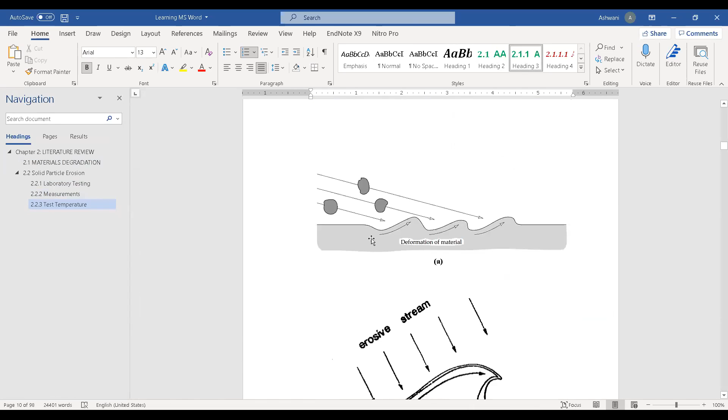Sorry, measurements is heading 3. Then the next heading is test temperature, heading 3. It is creating automatic numbers as well. Now this is another heading, heading 4 - test temperature, or we can say heading 3, depending upon the document's requirement.

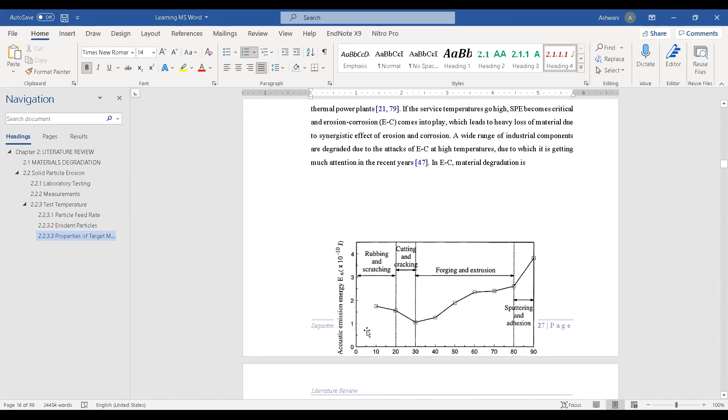So I am clicking heading 4. It is also heading 4, and heading 4 again. I have created many of the headings now. You are able to see all these headings over here in the navigation pane.

So there are a number of advantages of creating this kind of document in MS Word. If I want to navigate between different sections of the document, I simply have to click over here, similar to how we create bookmarks in a PDF document. These similar kinds of bookmarks are available.

Wherever I am clicking, I am easily navigating in the total space in the document. I can switch over to the different parts of the document.

Now coming to the next benefit, suppose you want to make a change, say this green color is not suiting you, so I am changing it to red. Suppose it suits you, then you have to go to another heading, click here, then click on whatsoever uniform formatting you want to make. So it need not be done like this.

I have undone the previous section, so it is back to the same kind of content and font. Now I will click on red color font, then go to heading 2 and right click over there. There is an option: update heading 2 to match selection. Once I click here, all the heading 2's will be changed according to the same formatting.

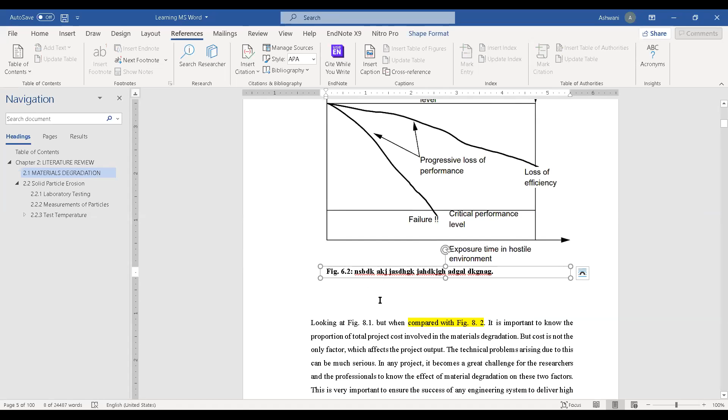Apart from again and again using the insert caption option, you can do one thing instead. I will be copying the first figure caption which was created, pressing Control C after selecting the text box for the figure caption. Now coming to the next part where your figure 2 is available, I will simply press Control V, and the same text box would be appearing over here.

Now press Shift and click on the figure. Group these two. Right now here the figure number is 1. Please don't make any manual changes over here, because you can see it is highlighted with gray color, meaning it is a field. It will be updated automatically.

Now this content is not highlighted. You can see I am moving my cursor on this text. Now this text you can change. So this is the figure 2 caption. These changes you can make over here.

Now how will this be helping me? Looking at figure 8.1, or I will write here as 8.1. I will choose the last one, figure caption 6.1. Now this is figure caption 2. Actually, I am using some shortcut keys in order to save time. So this is 6.1, you can see this is caption 6. This should be caption 6.2, and this is for the previous figure.

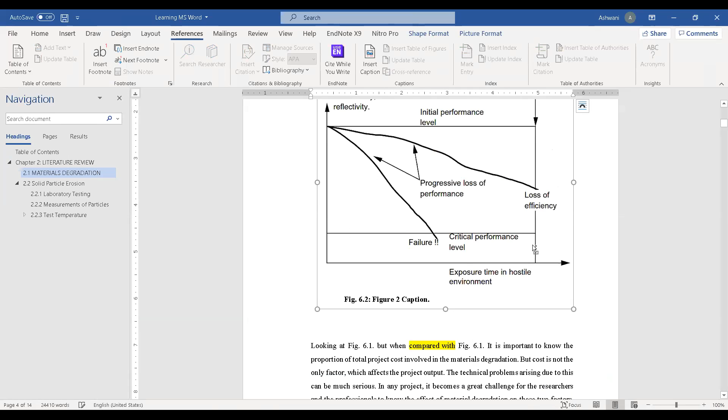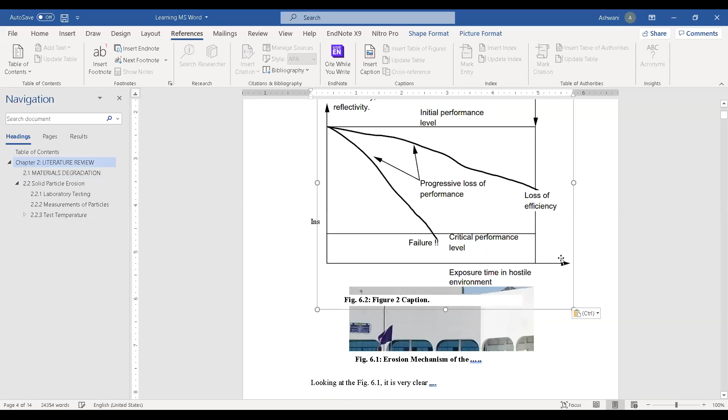Suppose you are taking this figure. I have deleted this figure, and I am taking this figure before figure 1. Okay, I have taken figure 2 before figure 1.

Now what would we normally do? We'd change this 2 to 1 and this 1 to 2, but here you don't have to make any manual changes. What you have to do is simply press Control P and come back. You will see that all the figure captions have been numbered according to the requirement. So even if you intentionally try to make the mistake, it will not allow you to. Such a wonderful system is available in all versions of MS Word, MS Office. This is a wonderful feature.

Now coming to that, this was figure 6.2. I have already mentioned figure 2. Now we had referred to it somewhere in the text.

This was figure 6.2, now it is again showing 6.2, but now we know we were referring to figure 6.1, which was earlier 6.2. How to change it? I will simply press Control A. Control A will select all the text in the document. Now you have to press the function key F9. Once you press F9, it will update all the fields within the document, whether it is table of contents, cross-referred figures, or anything else. These will be updated according to the current situation.

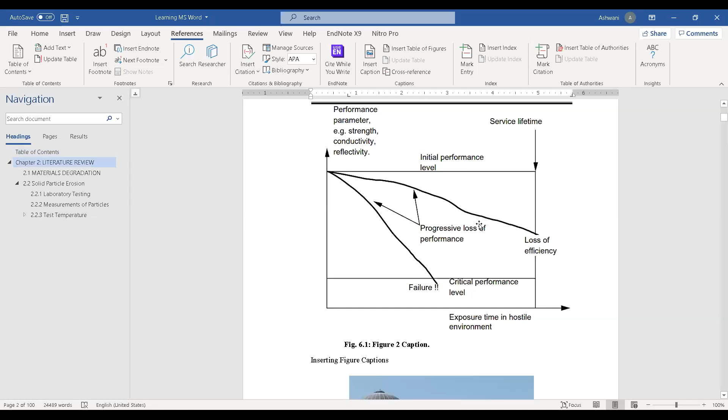We will be working on the table of contents. There is one more problem students face: they have to write the list of figures. We have to go to different pages, check what is the caption of the figure, copy it, and write it here as figure 1 or 6.1. You can also make mistakes here. Then you have to write down the page number at which it is available, say page number 11. This is how you develop the list of figures.

Okay, now leave this all. We are not going to do our work like this, because we have already done it in a smart way. Now for this list of figures, let me create a heading. This is also available, you can see it in the navigation pane. I have simply clicked on this heading 1, and you got an entry in the navigation pane. So it makes the overall content visible to you, the overall picture, in the form of bookmarks. So now coming back to our discussion.

We will not be creating our list of figures like this, the way we were creating before. So I will simply go to the References tab and create an Insert Table of Figures. Let me delete this annotation. Then coming to the table of figures list, there are a number of options available: classic, distinctive, whichever look you want, just choose it.

You need to select the figure label, because for different chapters there will be different labels. For chapter 1 it will be figure 1 point something, for chapter 2 it will be figure 2 point something, like that. So suppose I select figure 6 point something here, then just click OK. All the figures labeled with this particular caption will be enlisted over here. Now you can see when I click over here, it gives a background of light gray color.

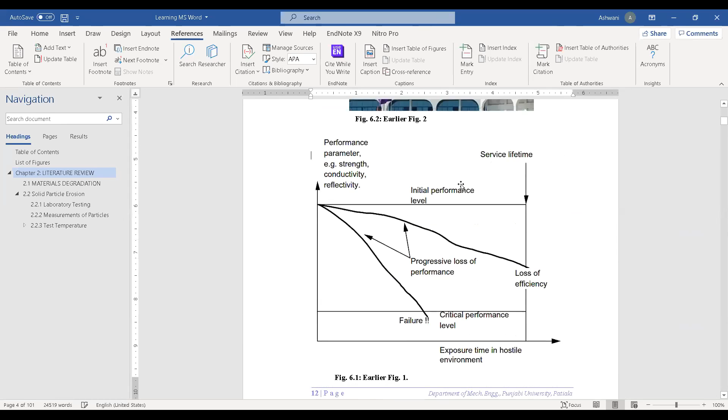Right now you can see I have again changed my sequence. So this was earlier figure 2, right? Now I need to make this figure 1 - this was earlier figure 2 according to the previous sequence. Now this one was earlier figure 1. So what we can do, I would have to change it manually, but I am not going to do that manually.

So there are two options, and I am using the second option - Control A, then pressing function key F9, then update entire table, once again update entire table.

Now you can see the figure number has not got updated. It should be 1 and it should be 2, but it is not updated here. So what we need to do is first press Control P. Once you press Control P and come back, you will see all the figure numbers will be sequenced automatically.

Have you seen the change, sir? Yes, okay sir. Yes sir. Now the option I used earlier before Control P, I need to use again, because the cross references I have placed need updating.

For updating these cross references, I need to use Control A, then F9, then entire table, once again, because I have used one or two or three tables here - table of contents and list of figures. Now you can see this was earlier 6.2, now it is 6.1.

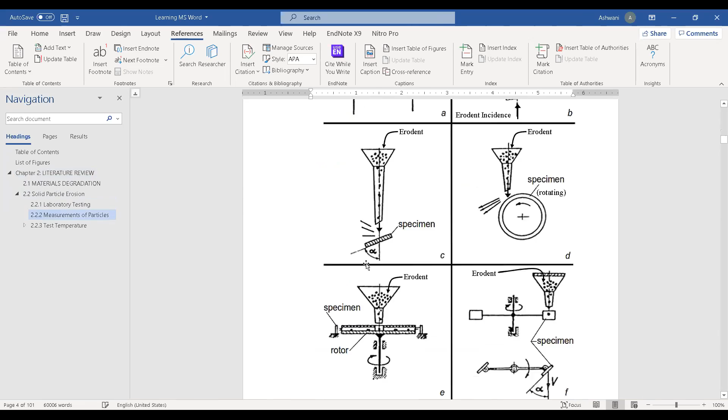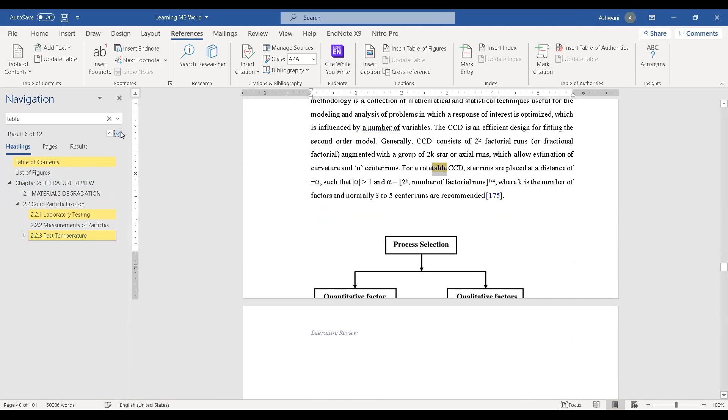Okay, now coming to the third part, that is our tables. I hope I have not missed that - I had used one table over here as well. Let me go to the table, let me search it. No, no, sorry, the table is not there, so we will create a table.

Let us see one thing more - let us quickly create a table. How to quickly create a table? I will simply press plus, then minus sign, then plus, then minus sign, then plus, then minus sign, then plus. Just press enter and the table is created. Do you understand how I created the table? I hope it is clear.

Once again, coming back - whatsoever plus symbols you have created, that will create your number of columns accordingly. It means wherever you have put a plus sign, it will represent a column. So how many columns do you want to create, how many rows do you want to create? Rows can be extended later on, but for the format of the table, I'm just pressing enter. Okay, so normally we write table 6.1.

Whatsoever the option, table, original table 1. So whatsoever the content is there, you can increase the number of rows over here.

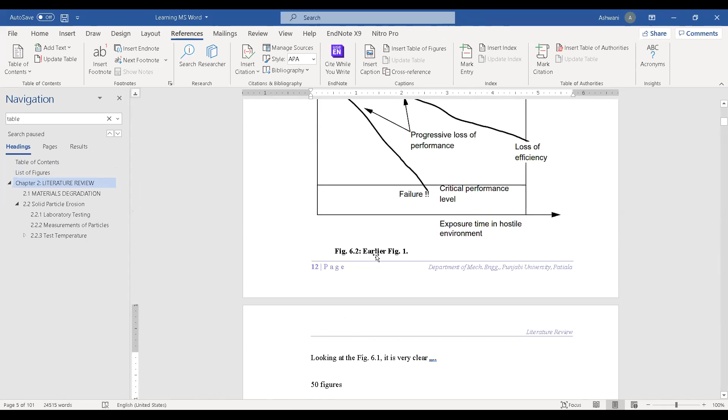Suppose this table is again here with me at this point, and now again I can simply copy this table caption, just paste it over here. This is original table 2.

Now how will this be updated? Table 6.1, Control P, come back and see it has got updated. So simple, Control P, come back, and you will see it has got updated.

Now suppose the data given in table 6.1, right? I want to cross-refer table 6.1. Then again, go to your cross-reference. Then we have to choose here table 6 point. 2 entries are here, we have created 2 entries, only label and number. Just paste here, you will get 'the data given in table 6.1 is the original table 6.1'.

Which is different from the data in... here I will mention, insert cross reference, 6.2. Again only label and number, no need to select again and again. Different from data in table 6.2.

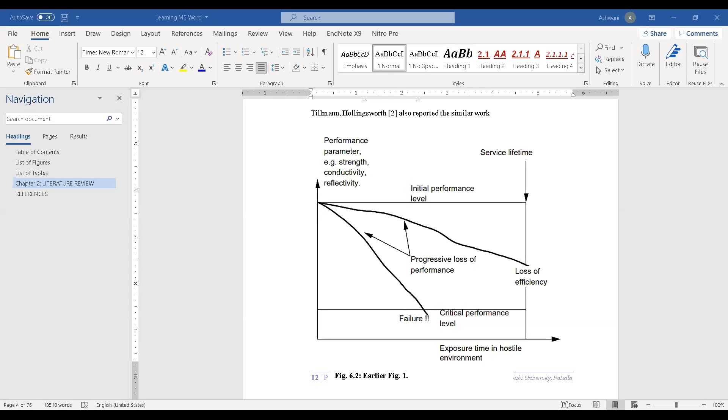Let me switch over to this window. Now by chance this paper, the PDF file, was available to me. Suppose this paper is not available to me free of cost, so I need the access to this file. I can open this file.

So in that case, what you can do is go to cite. There are a number of options for different software: export citation to text, export citation to BibTeX, export citation to RIS. This is the file format accepted by the EndNote library. So you just click over here.

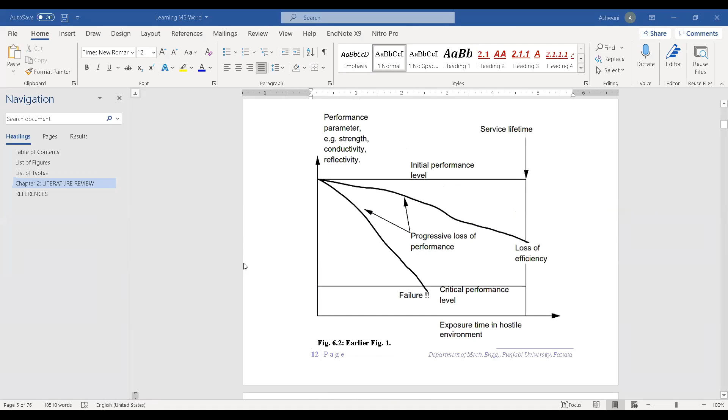Thank you, this is very informative talk. Thank you very much for sharing your valuable time. Thank you, thanks to the organizers and the participants who listened to me very carefully. I am quite happy that I could get many queries related to the work I have shared with you, so I think it will be helpful to all participants in research writing.

Actually, I was in a dilemma whether I should discuss all these things or not, because most of the time whatsoever you are discussing, participants already know it. I wasn't aware of your present level of knowledge, whether you were using all these features in MS Word or not. That's why I had to send a message in your group yesterday, so we could know which part to cover in the lecture.

Some other time, I would definitely love to discuss the MS Excel part. That is also a wonderful software helping researchers handle huge amounts of data. Number of options are available - conditional formatting, match and index commands, data filtering automatically - so there are many features of MS Excel which help researchers in their work.

So thanks for patient listening, and thanks to the organizer for inviting me to this platform and providing me the opportunity to share my experiences with the august audience. Thank you so much. Thank you, sir.